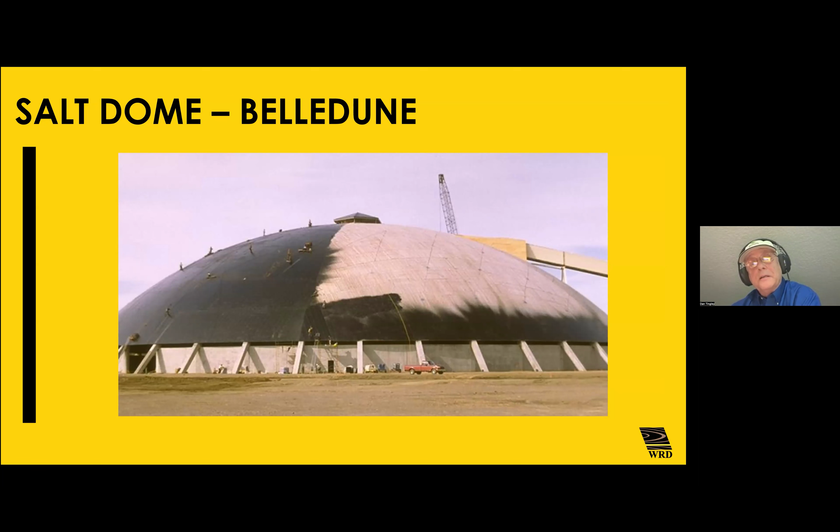This was our mass timber idea back in that day in the 80s, as you can see here, with the inside Belledune dome. What are we storing in there? Salt or potash or those sorts of things, in our large, very large glulam beam and glulam deck, or solid sawn deck buildings, which we called mass timber.

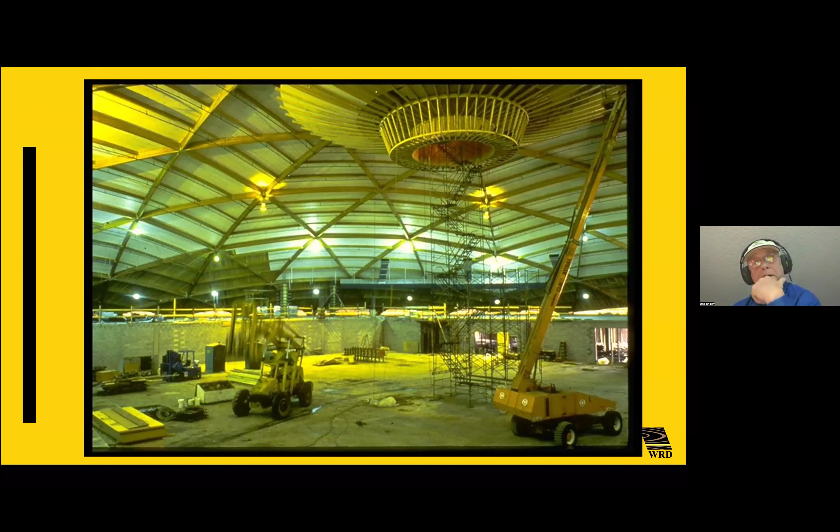Now, these great old buildings gave way to the 90s as we started to get a little bit more inventive with our strategies for curving and bending beams, as you can see here in these beautiful, aesthetically pleasing buildings that made bold statements about timber, and of course using timber in things like swimming pools, where steel just didn't do the job as well, because corrosive environments - timber just doesn't rust, as you can see here.

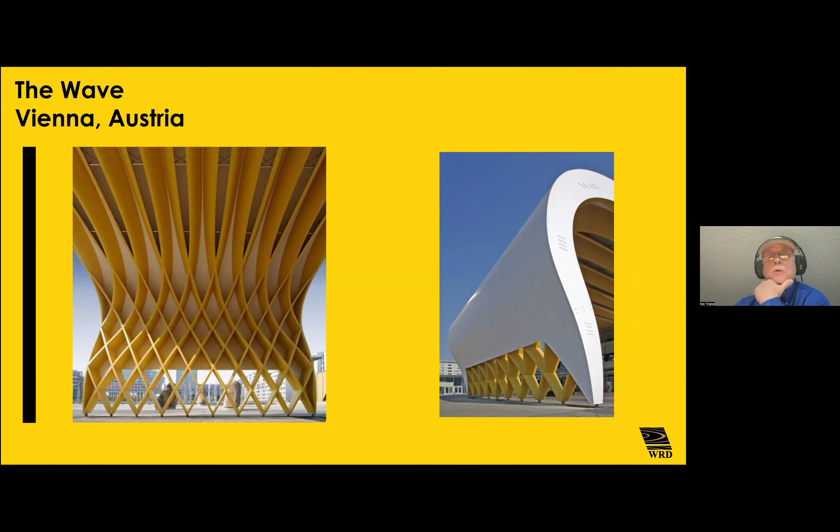Or this one I was involved with in Vienna, called the Wave. Only in Vienna did the oil money have enough money to make a wastewater treatment facility look like this. This is a high-strength fiber reinforced sinusoidal shaped glulam beam I designed in Vienna back in the day.

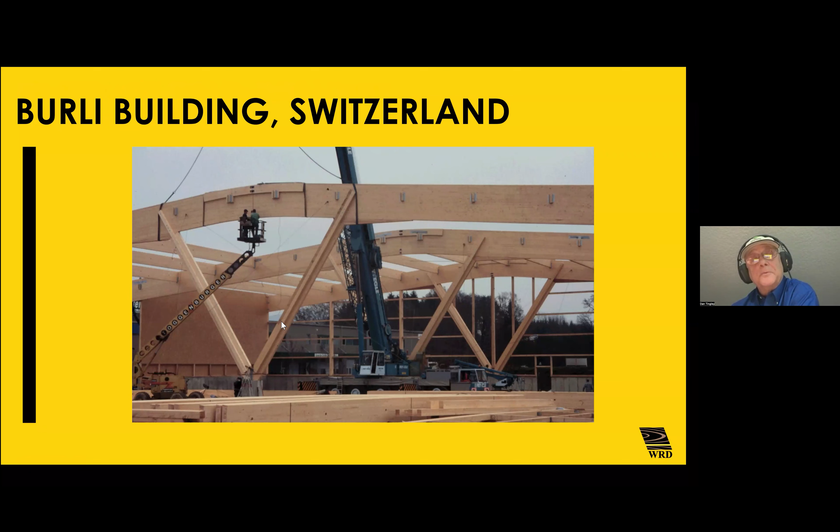Or another one here, a big playground equipment building. Again, what our vision of mass timber was in the 90s as we worked along with high strength fiber. You can see me bending over doing some QA on an FRP layer there. I had brown hair and more of it, as you can see. Now I've got a bad case of gray hair and less hair. I'm just getting older as the days go by.

But these bridges and buildings you can see here are just getting more and more extensive. This is the largest glulam beam in Europe, built with blowdown wood, from when we had high winds go through, and they were burning pyres of beef back in the day at McDonald's.

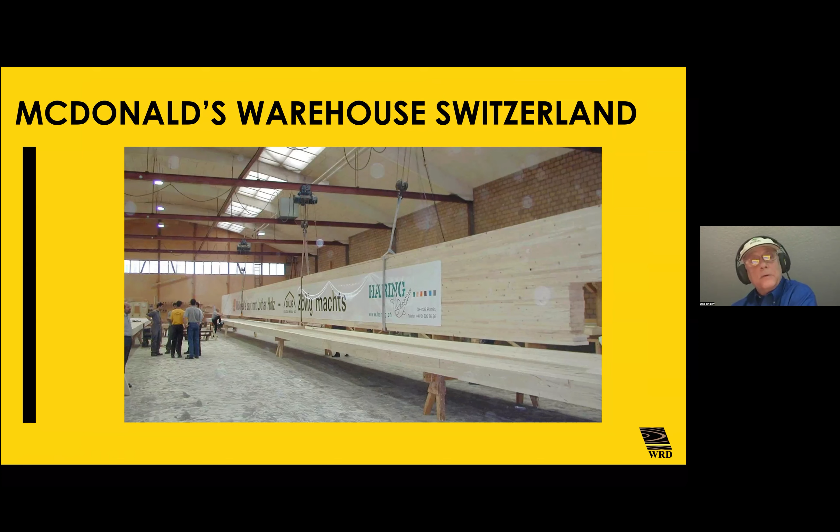McDonald's wanted to make an environmental statement. So in '99, we built these huge beams with high strength fiber out of blowdown wood. It was all micro-checked and shear. This is one half of a beam. We parked one half of a beam across the Autobahn, saying McDonald's building with blowdown wood, and parked 10 smart cars in front of it, and put the building up in 8 days because we wanted that increased speed of being able to assemble a roof system in place.

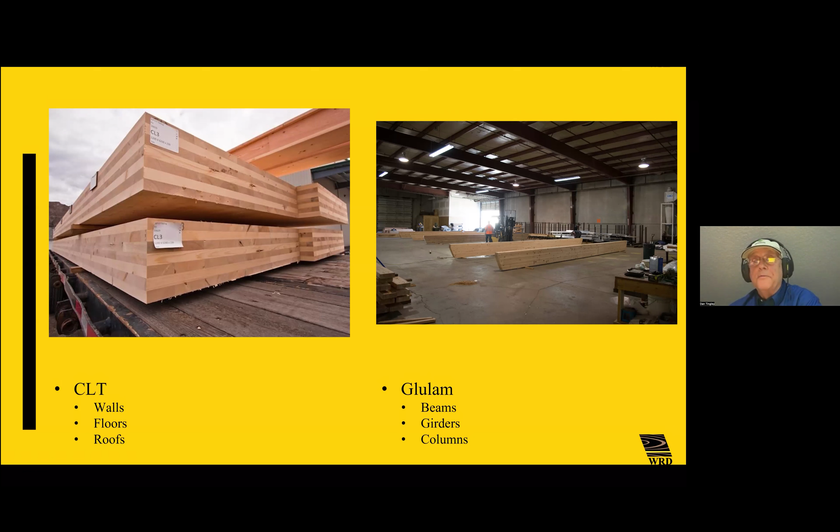And with this arrival, of course, is a whole level of interest that was not there in decades past. CLT, as you can see here, is basically cross-laminated timber, similar to plywood but made with much thicker solid sawn elements, to mate together with the glulam beams as you can see here. It's the traditional mode of being able to build a structure, lightweight compared to steel and concrete.

We can prefabricate components, and of course it has environmental advantages such as being renewable and having a low carbon footprint. The mass timber structures take on many forms now — we can have nail laminated timber, dowel laminated timber. We put them together with glulam beams and form up wall systems and post and beam systems, which allow us to build more effective structures that are aesthetically pleasing.

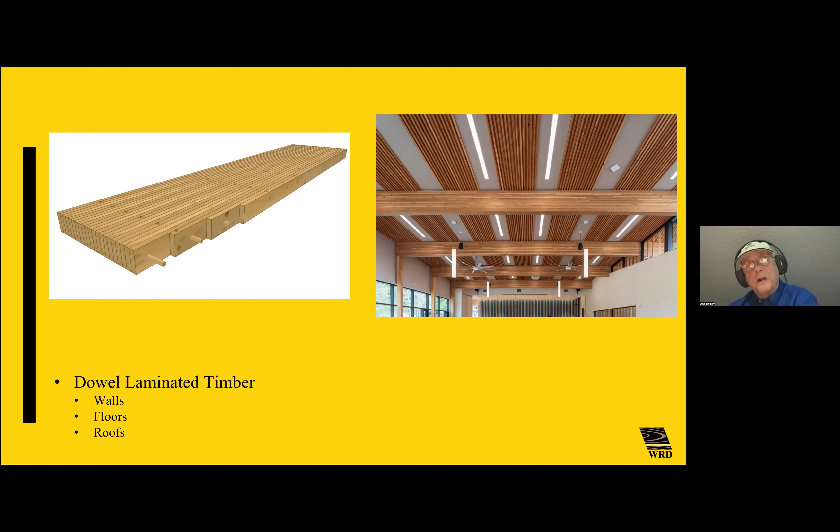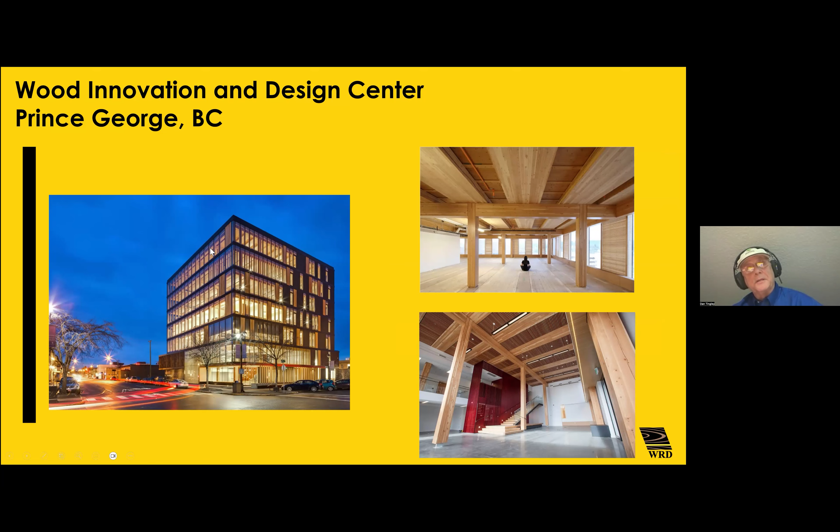Just how much lighter weight? In this particular bridge, the weight of the timber option was 1/5 — I'll say that again, 1/5 the dead weight of a cast-in-place option, and 1/15 of a concrete total superstructure and deck option. And of course, that's significant when it comes to reusing old superstructures.

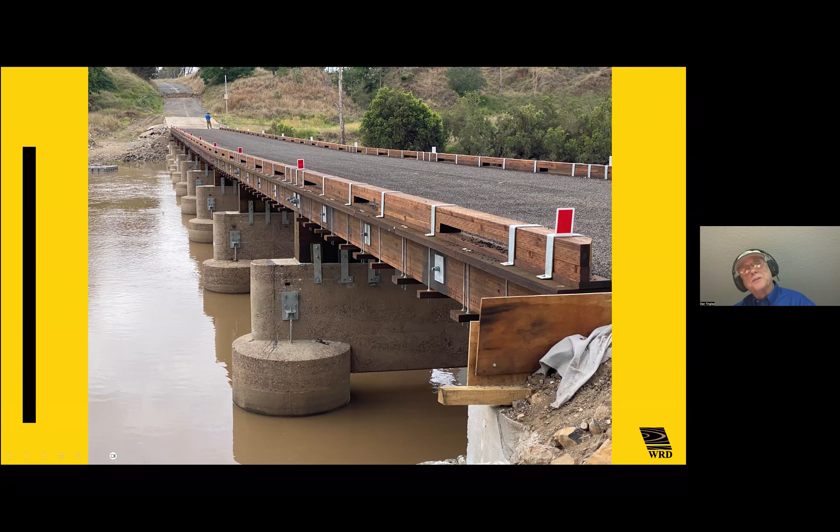As you can see here in this MPP deck system with a transverse diaphragm — what we call a curtain girder superstructure — there's a through rod that allows us to post-tension. Why are we doing that? Well, we've got to withstand floods, and the debris fields can be 4 or 5 feet high, hitting the side of this bridge 5 times a year. So we want a thin profile.

They don't install a TL4 truck crash-proof guardrail system — they want the river to top the bridge, they want the debris field to get by it. As you can see here, this provides for a typical new mass timber type bridge system, all pre-machined, pre-assembled.

This bridge was completely pre-assembled in the plant before disassembly and treatment with copper naphthenate in an oil-based solvent. Of course, you could not use a water-based solvent in this particular case, because typical water-based treatments like CCA or ACQ will swell the wood and distort the location of all the bolt holes, making it impossible to assemble on site later on.

So they're treated with an oil-based solvent and a reactive agent that fixes against the cell wall to provide that durability. Because one of the things the concrete lobby and steel lobby has used against timber is the claim that it isn't durable in their mind — that it's high maintenance.

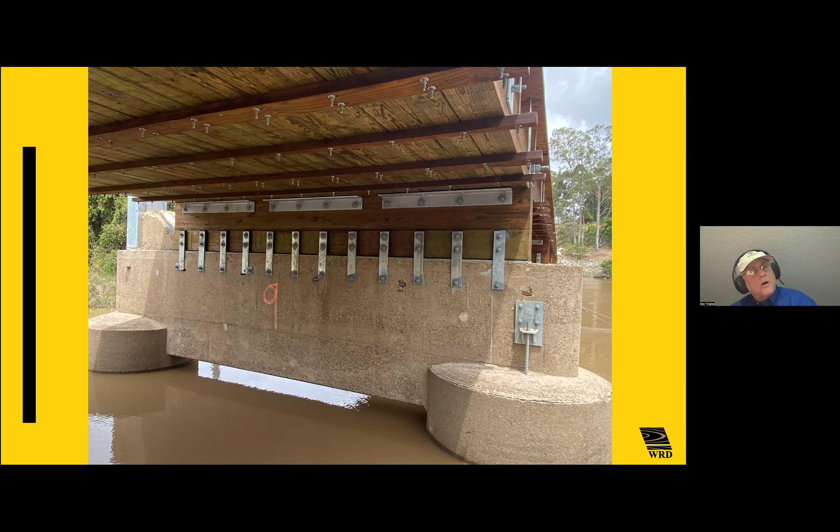And that's what they did. Well, guess what? Now concrete has got its own Achilles heel, as we're going to start to see here in a moment. And timber is making a big comeback, particularly in the mass timber form, as you can see here in this beautiful 10-span bridge. This bridge in concrete was $15.6 million. In timber and mass timber, it was 4.2. That's a significant difference, and one that drives the equation now.

Because of the naivety, the district chief engineer for highways in that area came to me when he looked at the prints, and he put a great big red line through our structural IFCs. He said, you can't build timber bridges anymore, they're not allowed in the code. I wrote back and said, I can't imagine what you're saying, because I'm on C9 and S6, the Canadian Highway Code, and I've been involved in AASHTO for many years, and there's timber bridges allowed in both codes. I'll see you at the bridge site.

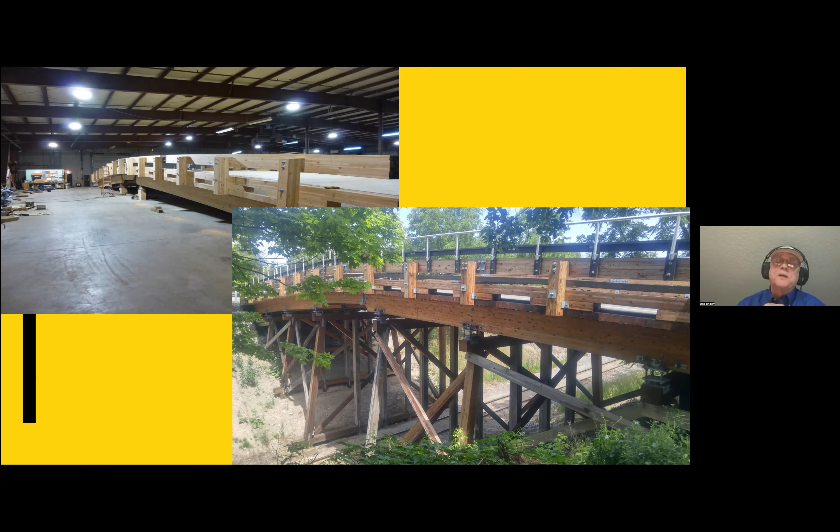Well, we arrived at the bridge site. He was there, he looked at this bridge, and there was no concrete. He said, well, you can't build a bridge without concrete, you have to have a concrete substructure at least. I said, why? Show me in the code where you're not allowed to put a bridge in place unless it's on a concrete sub. It's not there. It isn't there because it's not the truth.

The fact of the matter is that timber can perform well in not only superstructures but substructures. One only needs to look at all the timber piles driven for bridges around the country. Obviously, it doesn't have to be on concrete.

This bridge here was relatively new in the last 10 years. It was completely pre-machined, pre-assembled, taken apart, post-treated, lettered, numbered, shipped to the site. And of course, we compacted and put down an abutment bent instead of a concrete bent, instead of cast in place. This bridge went into service in about a third the time. Why? Because we didn't have to wait for concrete to cure. We didn't have to carry 8 times the dead weight, and we could put it into place such that this bridge from start to finish was 21 days on the install.

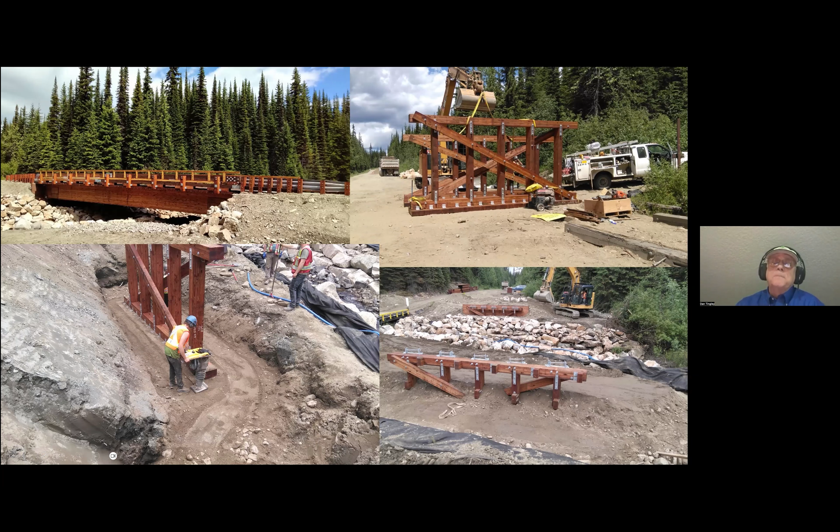The concept of doing that in concrete on a heavy 100-ton bridge, which this is for forestry haul, it just wouldn't happen. So this is the other place we see timber really shining.

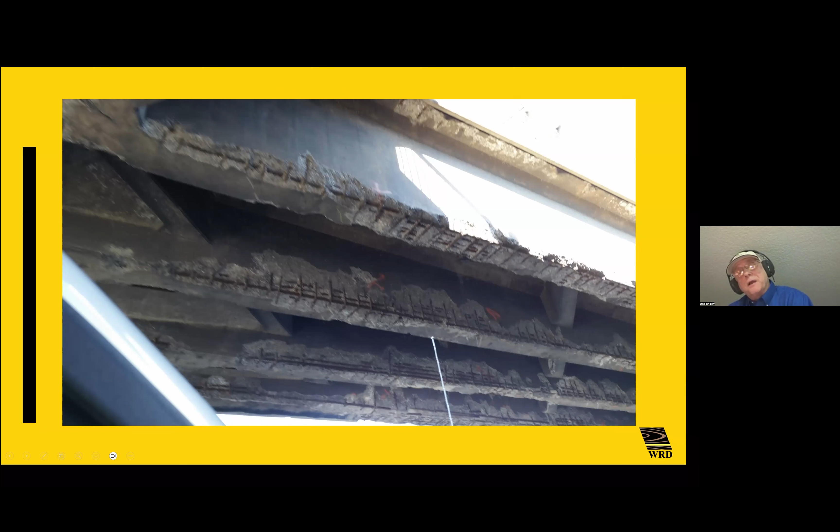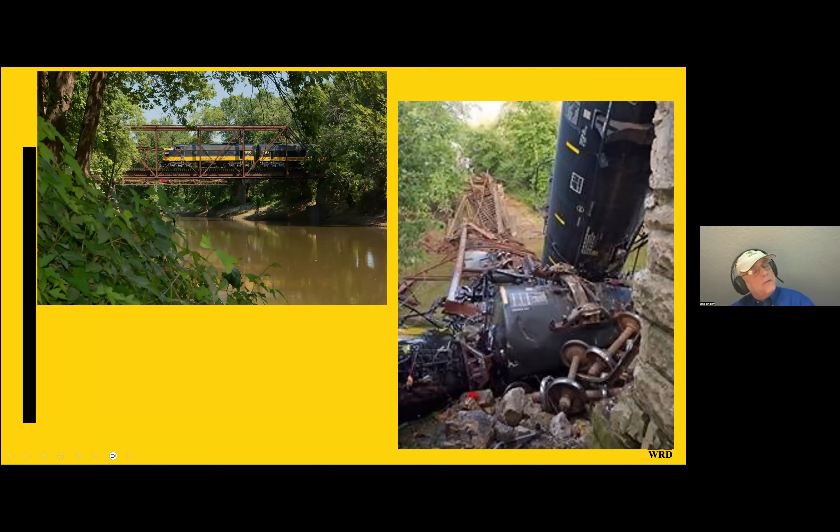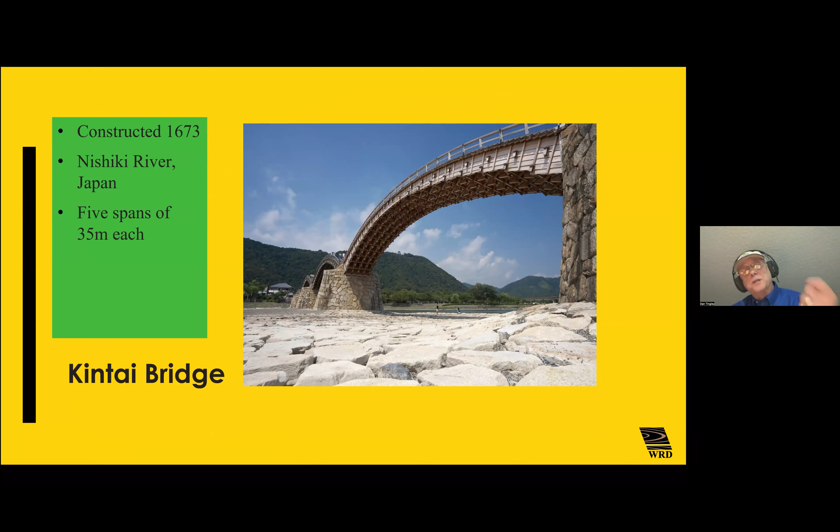It's because they're growing their connectors, and these connectors mean that we don't get moisture to the inside bright zones of these timber pieces, allowing decay to take place. So the same thing can happen when we build them.

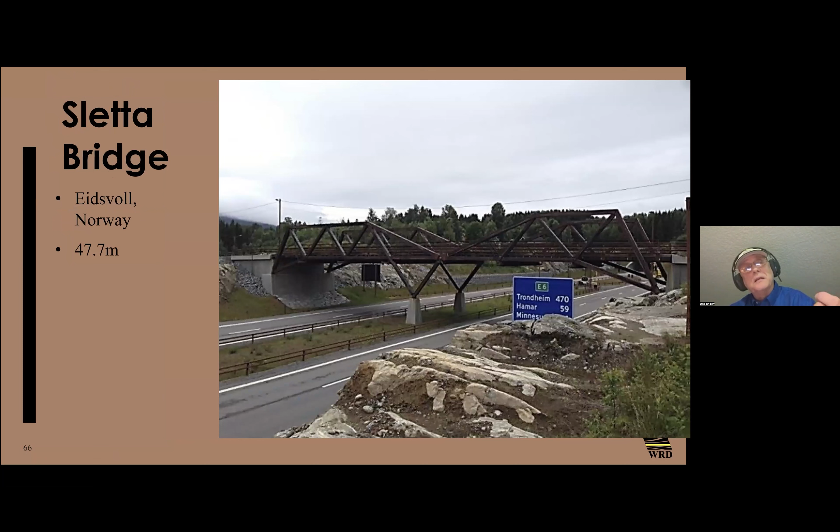Now, these are new bridges built in the last 10 years all over the world. Look at these spans - 47 meters, that's a long span, close to 150 feet. You see another one here. All over Europe, we're using these spans, creating long span bridges, replacing concrete and steel because wood doesn't rust.

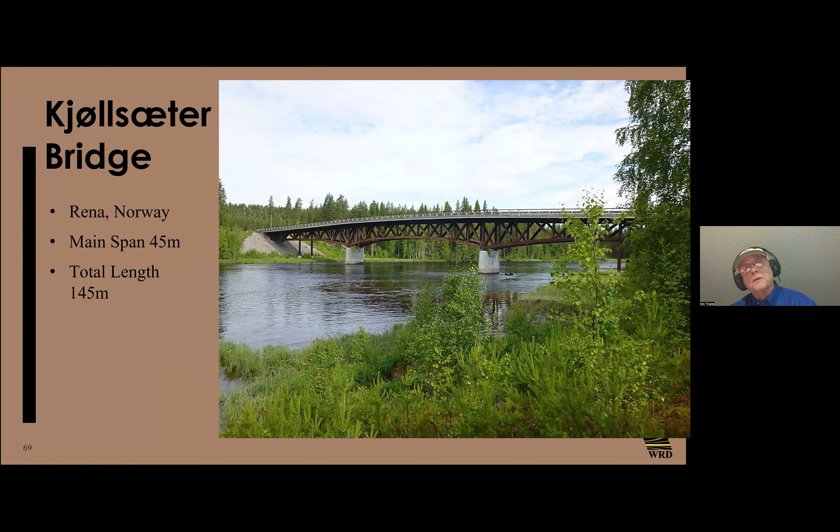And if you find ways to keep the moisture out of the bright zones in the interior portions of your timber elements, they're going to last a long time, as you can see in these various photos. Beautiful timber bridges, building roofs over the top of them to keep water off of them, to keep them going the distance.

This one in New Jersey, similar - putting them together in bits and pieces and keeping them going down the road. This one here was 10 tons. It was an old timber bridge that had an MPP deck on it, not treated. Of course, the vertical fasteners went in through the top and let the moisture in. It was 80 years old. It was time to go.

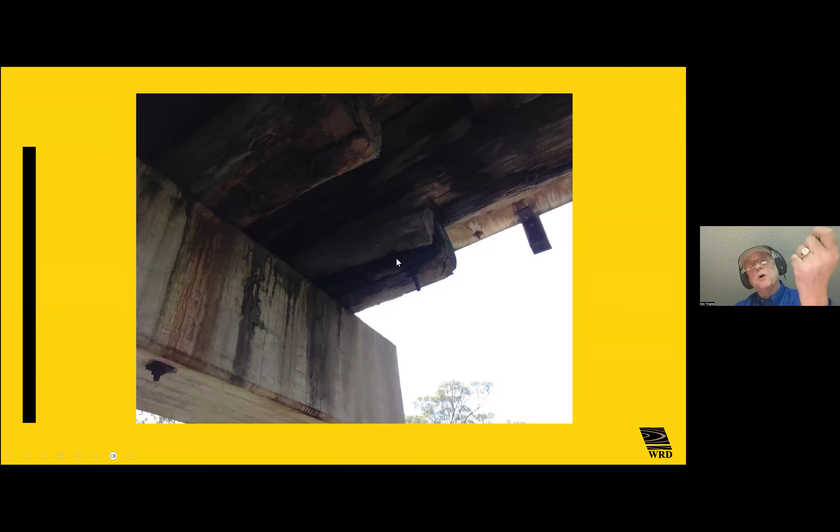We had a community, an island community, that would have been landlocked. A bypass bridge was $2 million. A concrete bridge was $6 million. So in 11 days, they built a floating scaffolding and replaced this bridge piece by piece, putting it back into service in 11 days to get where they're going.

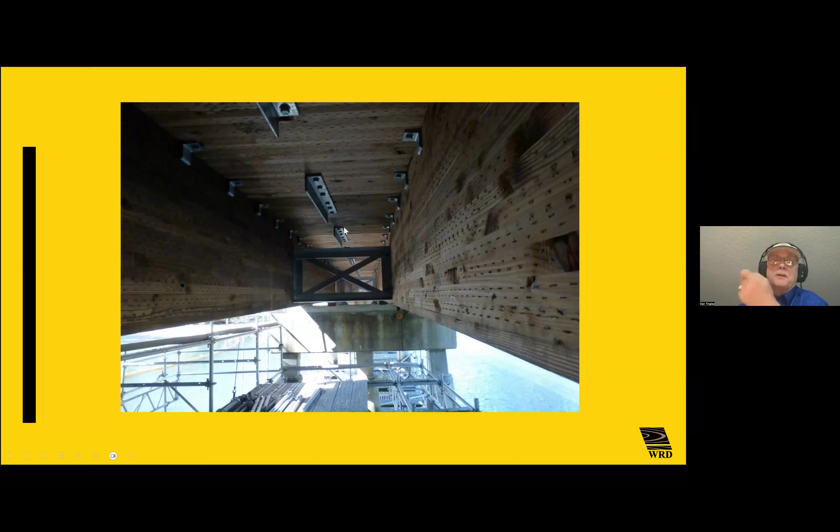What was different? No vertical fasteners from the top, and no treated wood. That's a eucalyptus hardwood chosen for its durability, with stainless steel clips from the bottom, everything originating from the bottom but not passing through the top surface, as you can see here, with expansion slots to allow the deck to shrink and expand as it picked up moisture. You can also see gauge beams that provide for differential deflection to keep the asphalt from reflective cracking.

So you can see here, this particular case is in the jungle, way up close to Papua New Guinea, where they are putting in a new timber bridge in a very harsh environment: the highest decay hazard zone, the highest termite hazard zone, the highest embedded and exposed corrosion zone. All of these factors would normally lead one to consider putting in a concrete bridge because they'd say, well, it's got to be durable.

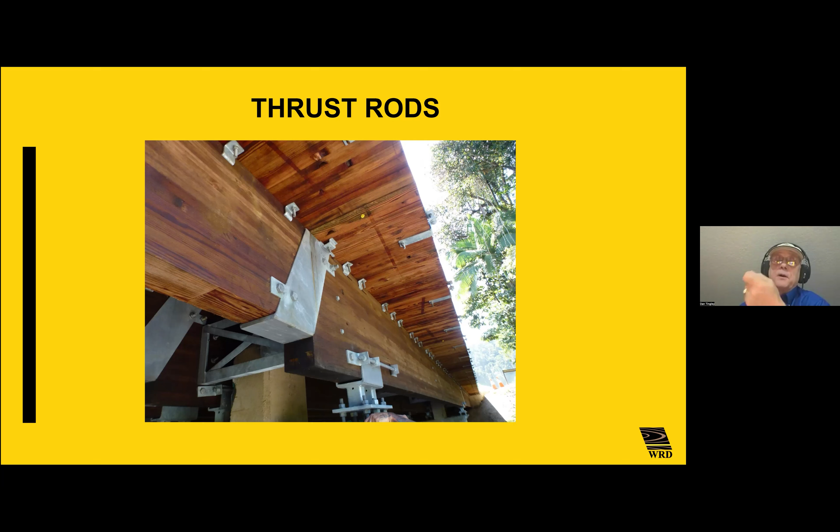Well, timber can be durable too, creating a great solution for this bridge replacement, with thrust rods, for example, to allow us different spans. This bridge was built in Jefferson, Oregon, and shipped halfway around the world into the jungle to be installed. Why would we do that with timber unless they were confident? They're confident because they like the carbon aspects and the durability aspects we can create today with new technologies and new concepts.

Same goes with this. This is on the west coast of Australia, an old timber bridge that was 100 years old, and the community wanted to keep that timber bridge in service. They didn't want to take out the history of the past. So we developed a restoration system that took out these old vertical fasteners in the deck and put a new deck down. And we didn't heavy-coat paint the large dimension timber.

You can't put heavy percent solids, over 29% solids coatings, on large dimension timber outdoors and expect it to last. It has to be less than 29% solids if you're going to see it last. That looks like paint, but it isn't, as you can see here in this whole new system. And you're turning the rails 45 degrees so that everything runs off, keeping the proper scuppers and no verticals in that whole system. Our design kept that bridge open for traffic while they upgraded it.

So the advantages of timber bridges are pretty important to note. Typically, on average, it's 1/8 the dead weight for an equivalent structural capacity concrete bridge. This allows a smaller substructure and subsequent cost savings on the foundation and site works. On long spans, the self-weight of concrete becomes the biggest design factor.

One of the greatest things I like to do as a designer is get involved in a long span design—79, 80, 100 meters, let's say 350 feet clear span—and use high strength fiber, because I know in that particular case, the self dead weight of concrete is going to be their biggest single design factor, and that's where they are just not in their sweet spot.

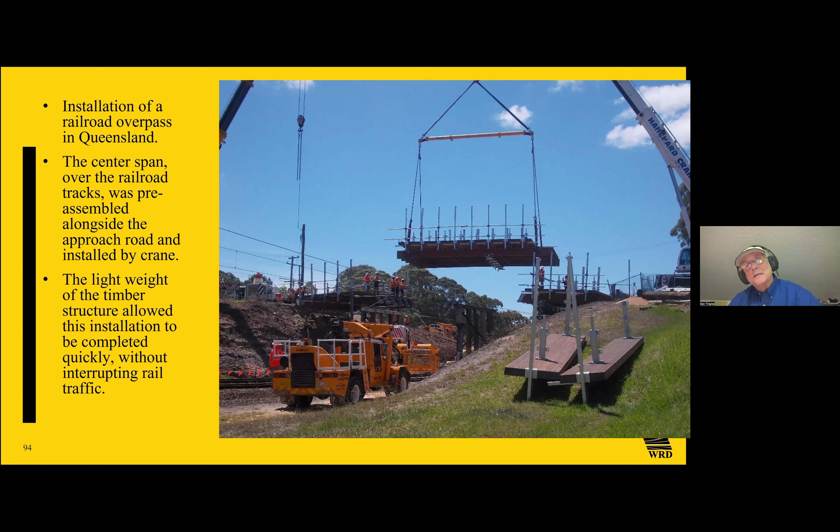This rapid installation is a big feature of wood, and low initial cost. Traditionally, the minute we exceed 100-foot clear span, the cost of the super and deck starts to migrate down to be 60% less than concrete and 30-some percent less than steel. Reduced carbon emissions is a big, big feature—21 times for steel, 16 times more effective than reinforced concrete, as you can see here in this particular bridge.

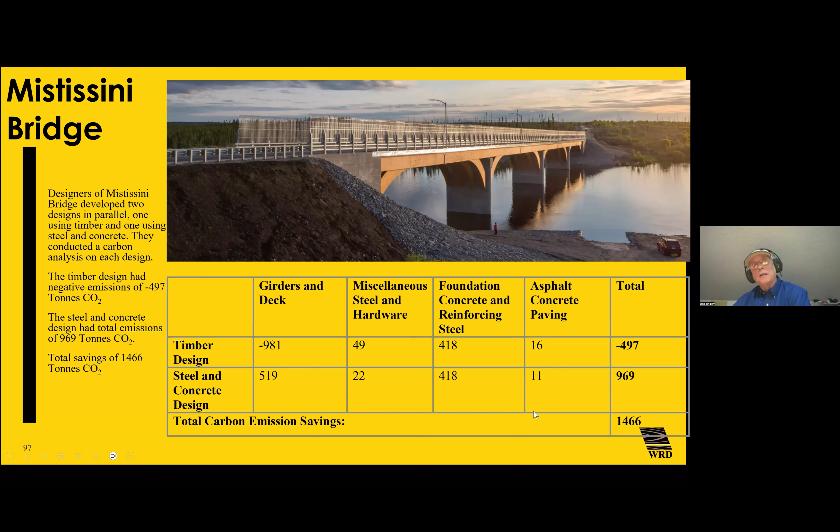Look at the savings here - that's a metric ton savings. That's a lot. So these chemical resistance features are really good too.

We often talk about salt on the road up north, or salt-sand mix up north on the roads. And this salt really works a magic on reinforced concrete - that chloride-rich environment takes it out easily with spalling and other issues related to reactive aggregate.

And of course, resistance to freeze damage. We all know that wood has a much better freeze-thaw cycle resistance than concrete.

Fatigue resistance - we don't need to use a fatigue factor in timber. In some countries, like Australia, where the timber code portion of the bridge committee has been controlled by the steel guys, they artificially put a factor of 2 in for fatigue for timber, which doesn't even apply.

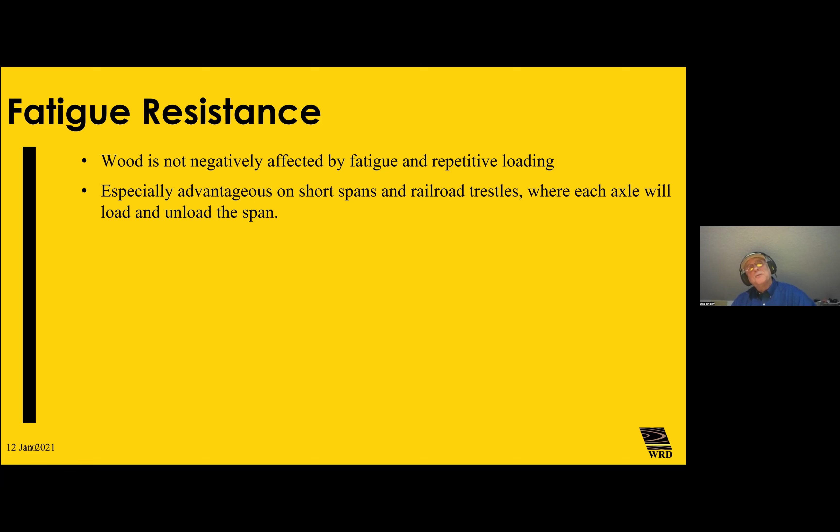We still have some codes in Europe specifying expansion joints in timber bridges. Wood doesn't expand thermally enough to require a joint - there's no expansion joint required. The only joint needed is for differential deflection between an abutment and the timber deck itself.

So where do I work? I work at Wood Research and Development. We're a code-approved test agency, third party and testing. We're also an American Lumber Standards Committee test agency. We have a commercial engineering wing. We do a lot of testing and design.

We developed advanced fiber solutions. This is one of our big areas that really feeds into mass timber today, using high strength fiber like Kevlar particularly, which matches well with wood because of its thermal coefficient of expansion properties. And using these high strength fibers in a way to basically transition by localized defects in the wood, like slope of grain created by knots, for example.

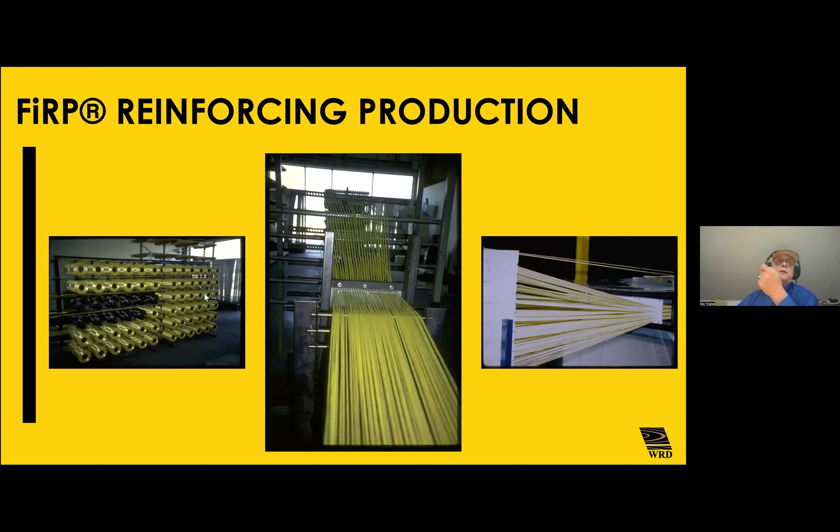So now you can have high-strength fiber on a roll - you can have up to 2 miles if you wanted on one roll. You use it and cut it off in certain lengths, put it in strategic locations. It's 5 times the strength of steel at a fifth the dead weight, and matches things well.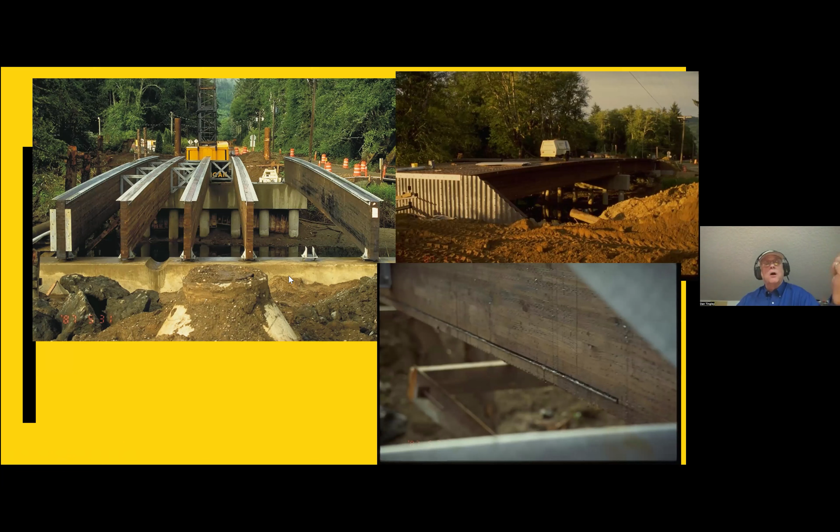And it's been in service a long time, and it's in the AASHTO standard, and it's in various codes around the world. It all originated from my design principles back in the 80s and 90s. As you can see, this first highway bridge in America was built in 1995 in Clallam Bay in Washington State, in service since that time, doing a great job.

You can see the high strength fiber here, doubling or tripling the moment capacity. And through fire test, we put it through for both single member and assembly methods.

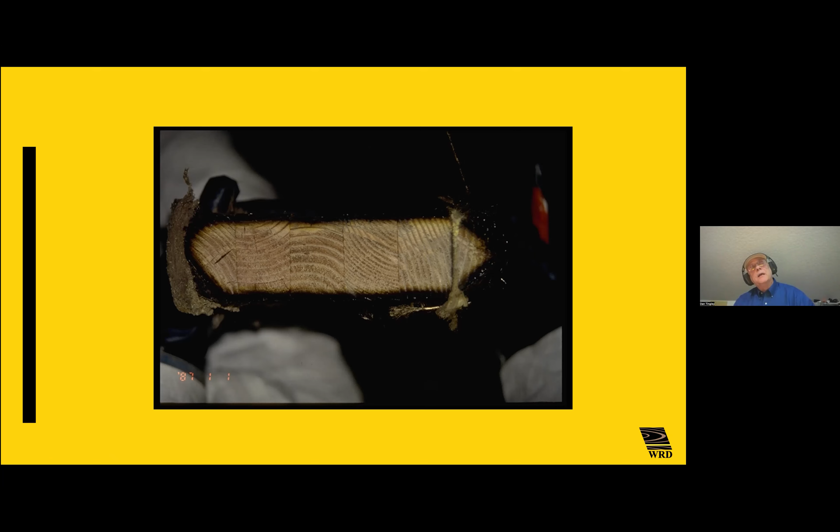And one of the great things for high strength fiber is, what does it do? It increases the moment capacity by 2 and 3-fold, allowing us to get 2 and 3 hour fire ratings out of our timbers because of increased moment capacity. We often say wood's governed mostly by stiffness. Well, that might be true, but moment's close behind, and what drives egress and access in fire scenarios is moment, and being able to increase its capacity with high strength fiber that way, giving yourself more time, is very important.

Of course, testing in our lab has formed a huge part of it, with over 3,000 full-scale beam tests over the day, including strain gauge data all the way across to establish where shear is at a maximum, for example, and so on. So you can see the size of our beam tester in our lab.

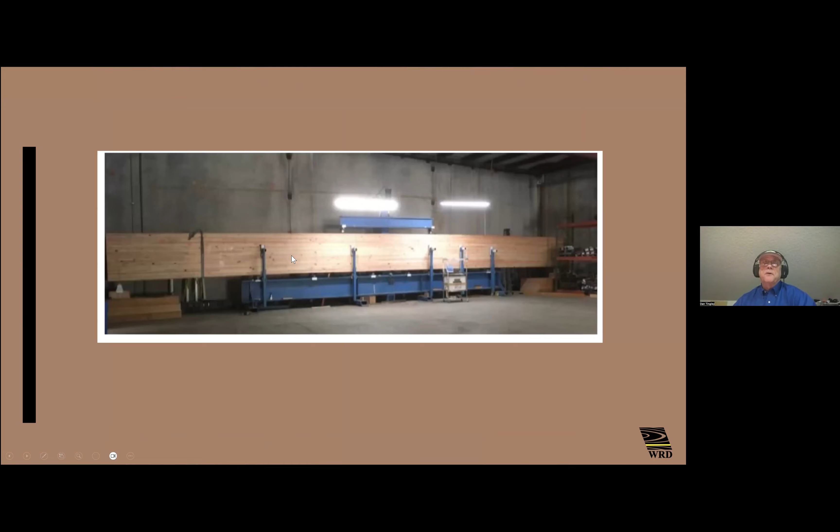We do some big beam tests and small ones, and pile testing, as you can see here with strain gauging pile wraps. We developed the Fiber Wrap 2 product that Osmose use on the utility poles.

So this full-scale established testing is there also to look at things like horizontal shear. 65% of horizontal shear failures occur at the late wood, early wood interface in wood. So how do we gauge that and deal with it?

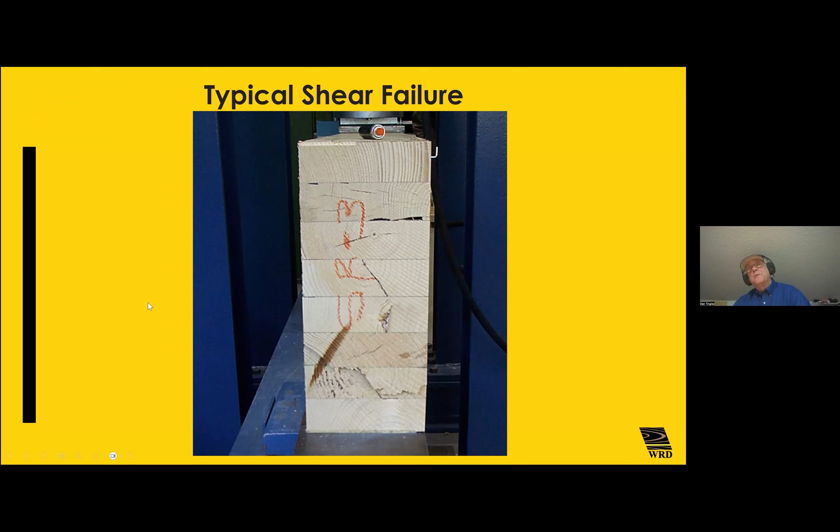Well, you can have high strength shear reinforcements as well, increasing the shear capacity of a piece so that we strategically design these mass timber bridges now to be fine-tuned, with strategic location of advanced materials to handle shear, and strategic location of advanced materials to handle high tension zones. This allows us to post-treat and get where we're going.

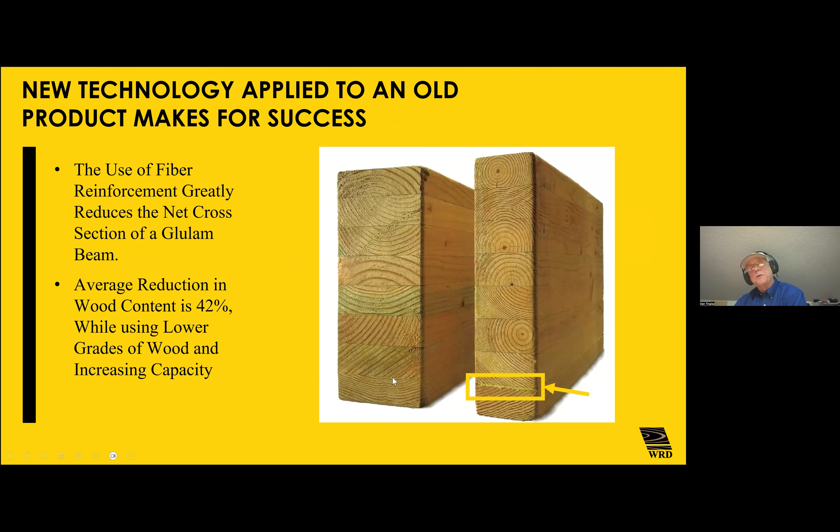You can see here the fiber on the right, reducing 42% of the wood fiber needed. And the wood fiber used is all low grade, as you can see here. The one on the left is equal to the strength of the one on the right.

We just basically reduce the variability, which increases the capacity too, by reducing the amount of premature failures due to slope of grain, due to knots. You get a knot in the bottom face of wood, and it creates a slope of grain.

Wood's tension perpendicular to grain strength is its weakest Achilles heel. When you resolve the stresses around this knot in the slope of grain, that's what causes the failure. That's why we don't like big knots in the bottom face, whether in solid sawn elements or in our glulam beams.

So there's a dichotomy of high strength fibers available out there today. Everything from quadraxial tribrid wraps for piles to high strength fiber in tension, and for shear panels and off-axis shear. So we do a lot of this testing, as you can see here in the lab.

We develop wraps, as you can see here, for utility poles and piles. We do compression tests for these to establish what capacities are with both the wraps and the injected slow cure epoxies that are used to fill voids, for example, in the restoration of old structures.

And this then allows the implementation of these high strength fibers to mass timber bridges, to fine tune this to make us more and more competitive with steel and concrete.

Today, just so we understand, this isn't about initial cost. If it was about initial cost, every bridge being built in America today would be timber. This is about a victory that was won in the 60s, 70s, and 80s to convince an industry that timber didn't last and had high maintenance costs.

We're about convincing an industry today that that isn't true, that you can build these bridges out of timber and use things like shear panels to get where you're going.

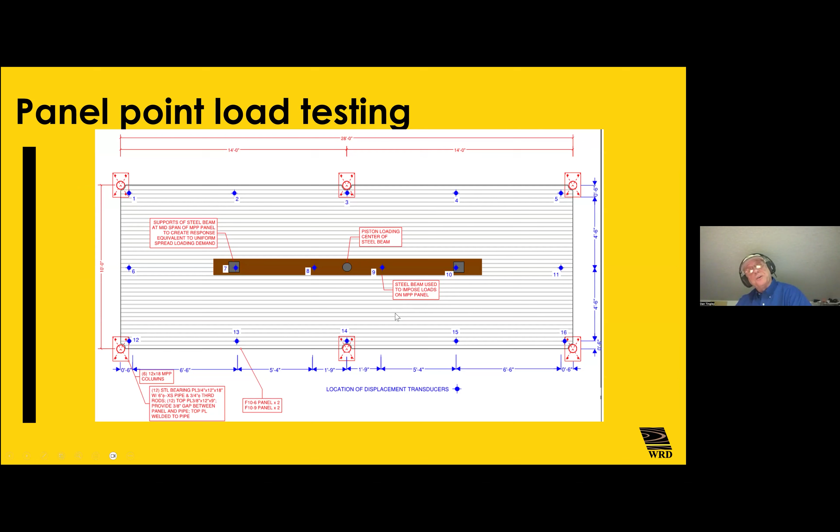Not only in shear panels from the point of view of minor axis shear issues, which you can see here in one of our test setups at the lab, where we developed a way to increase the minor axis shear for platform framing of mass timber versus post and beam framing.

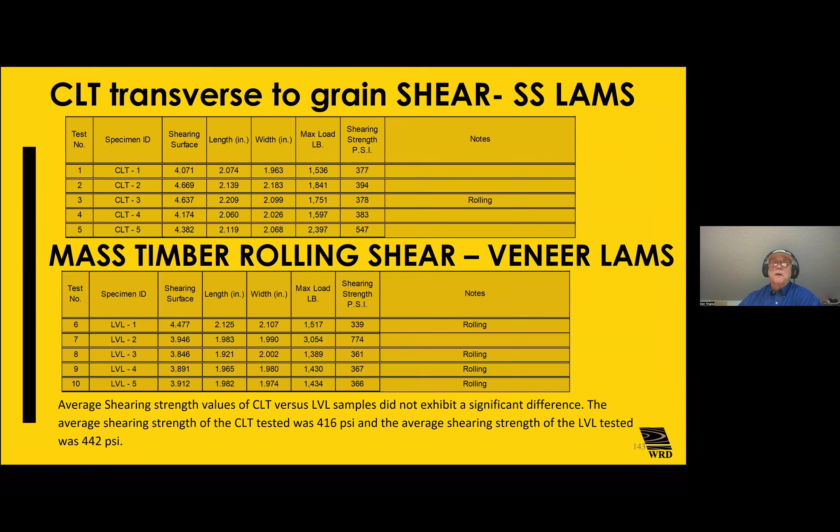As you can see here, the placement in these CLT systems of high strength fiber on the tops of the columns deals with transverse or rolling shear issues which exist in CLT, as well as mass plywood panels. That rolling shear issue is a result of the weakness of wood in cross grain to shearing, as you can see here.

So this shows you a reinforced panel that gets placed at strategic locations in CLT and mass plywood panel to get where you're going, taking this system to this system, and getting where you're going with thinner panels in this system.

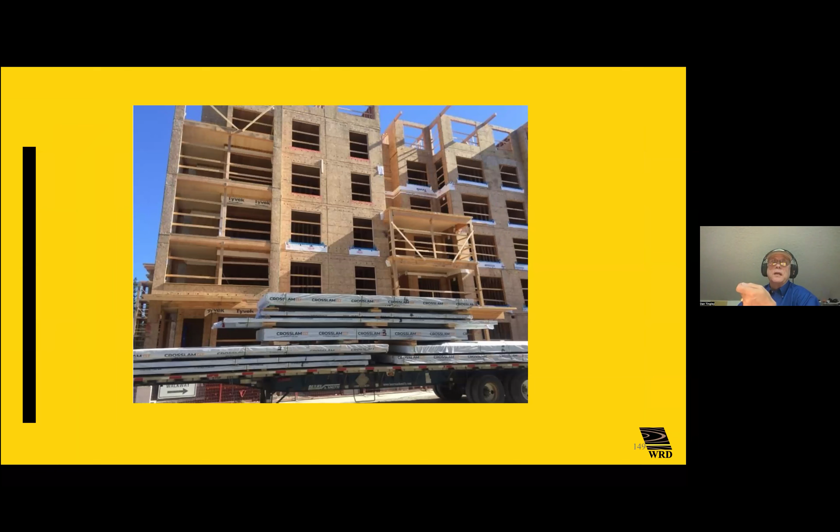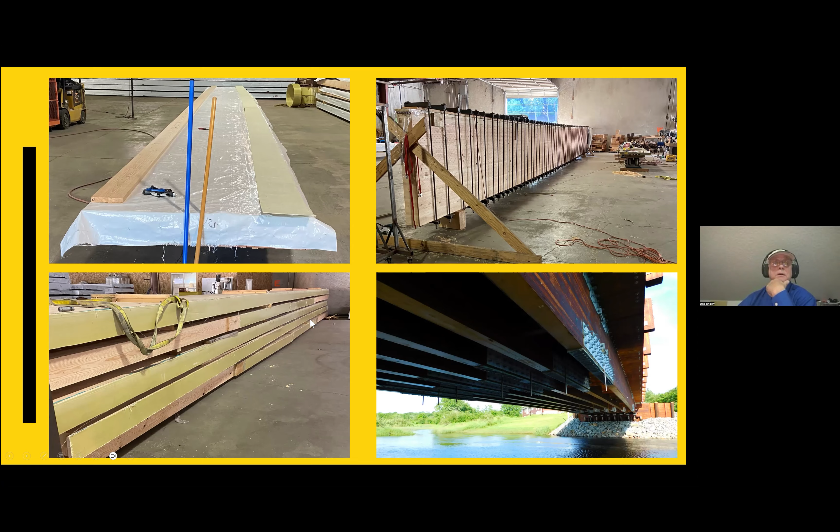In rolls, to be unrolled and used in strategic locations. This has advanced the use of timber in bridges more than perhaps any other development in the last 20 years, to get where we're going with a lot better capacity. You'll see here the placement of this FRP in its particular zones. You see it here.

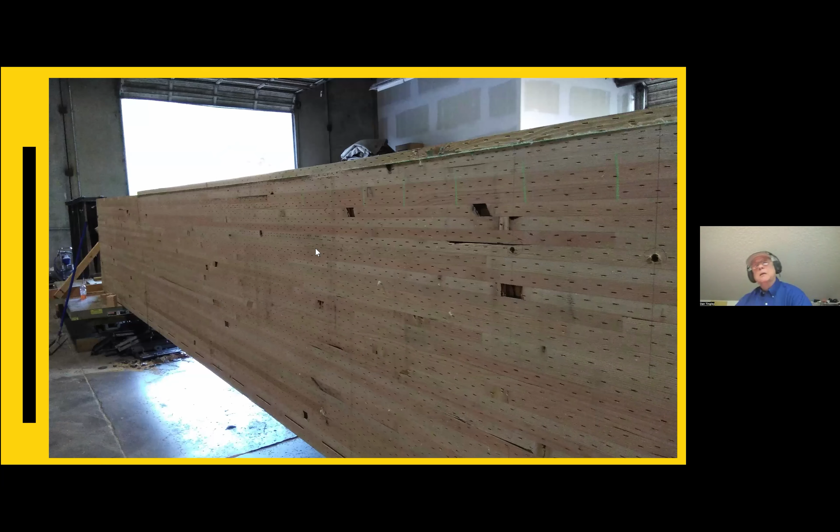So we'll use this to do wood welding. As I said earlier, wood welding is a big feature today with bridges because you can't ship things in America over 60 feet. So how are we going to make a 380-foot long bridge? Well, we're going to wood weld that together on site.

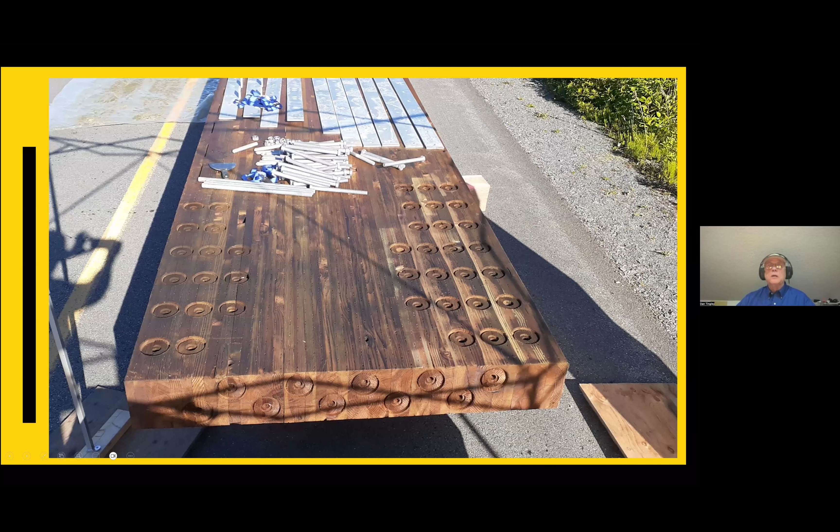We pre-machine it in the factory. As you can see here, all the shear plates are pre-machined. We take these pieces of timber and put them together with strategies involving shear plates, shear pins, doweling, side plates, and bottom splice plates. They infill all the cavities around the split rings and shear plates, depending on what's used.

They're all infilled with structural epoxy so there's no slip distortion at a joint in long span beams. We use thrust rods to pull it together to get the 125 PSI we need on a butt-to-butt joint, and then we basically create a wood weld at that location with high strength fiber, equal to 125% of the wood's capacity in any other location, as you can see here.

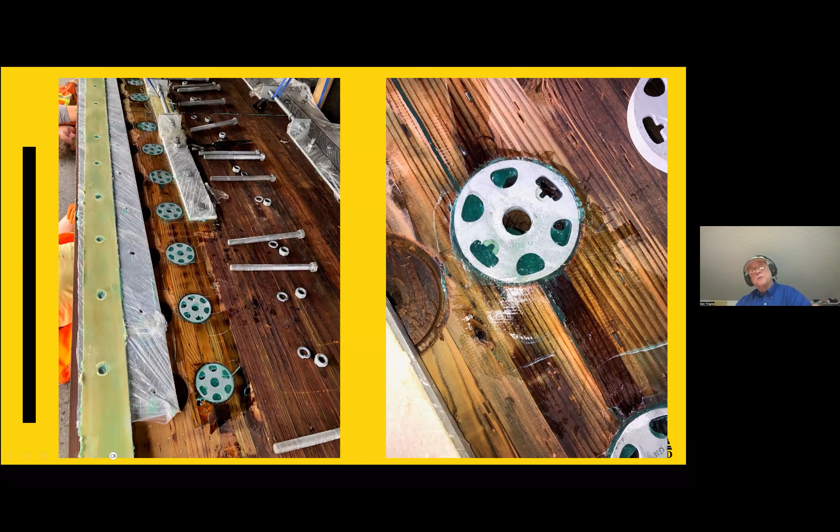This is new technology, new concepts creating mass timber bridge opportunities we haven't had before in the industry. You see this piece of Kevlar here with a design capacity of 215,000 PSI. Strategically placing this in certain locations gives a huge advantage.

And why is the steel completely saran wrapped? Well, you can't marry up steel with wood and glue it, because steel's thermal coefficient of expansion is so significantly greater than wood that modest changes in temperature will create a blowout in that steel plate. It will lead to expansion that exceeds the pilot hole size in those plates and create distortion in the connector, creating lateral loads on lag screws, for example, in the splice plates, as you can see here in the bottom face.

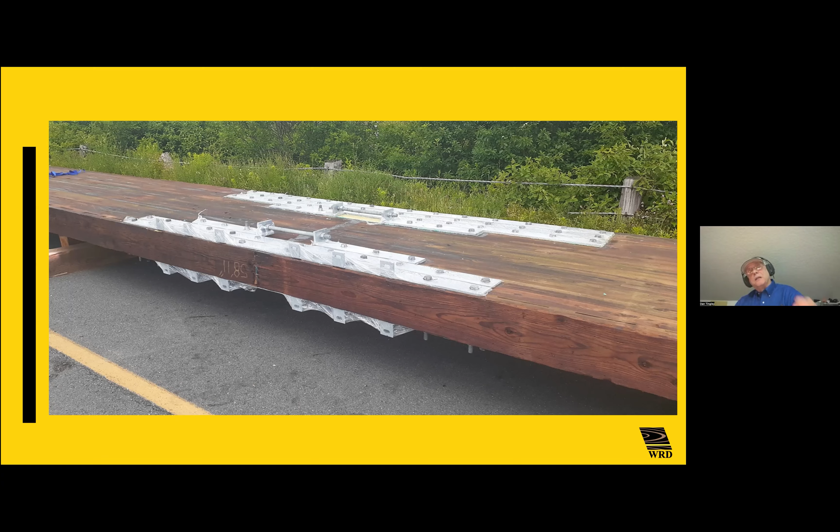This wood welding is a serious opportunity forward in the competition with concrete. When I can go 4 beams at 60 feet apiece, 240 feet long, and create that beam out of timber, it weighs 1/12 the dead weight of concrete, costs 60% less than the precast concrete girder, while carrying the same loads as the concrete.

This is what vaults timber ahead of concrete in these locations. This particular bridge, called Dillman's Bridge, was $6.2 million in precast concrete with cast-in-place abutments and deck. This bridge here, built out of timber, was $3.2 million. Those are significant savings that create the opportunity.

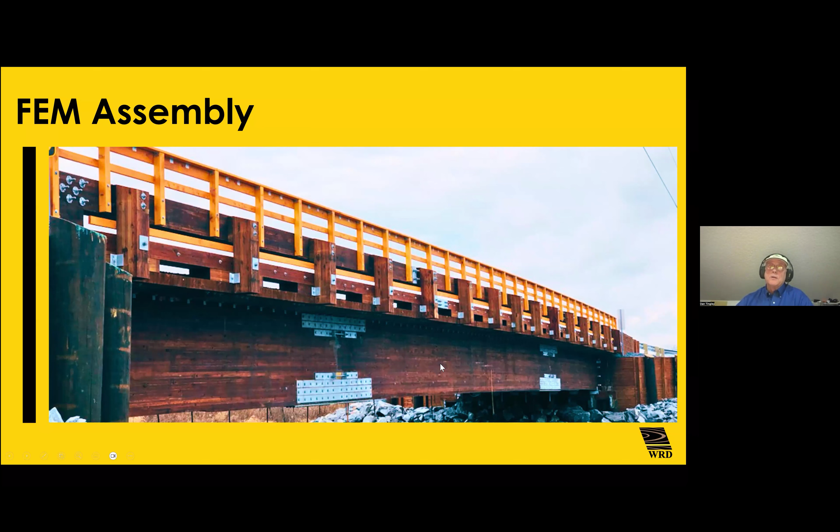In timber, when you get large dimension pieces, it chars, or if you want to protect it, you use an intumescent. Today we use intumescents on our timber when they're in fire-prone areas to get the extension of life we want and protection against bushfires and so on, as you can see under this bridge here.

Not to brag about this, but in 1996 we won the Charles Pankow Award for Innovation for this. Then in '97 we won the Nova Awards, the first time ever won by wood. We were up against the steel-less deck system in the first award, and for all construction products we were up against mostly concrete and steel competitors. Timber won those awards.

At our lab, we do things like species identification. We take cores from old bridges, as you can see here, and identify the species, the grade, and the moisture contents to establish things like the average moisture content in a closed deck timber bridge, which is 14.2%, not close to 22 to 24, the decay point. In an open deck bridge it's 16.4%.

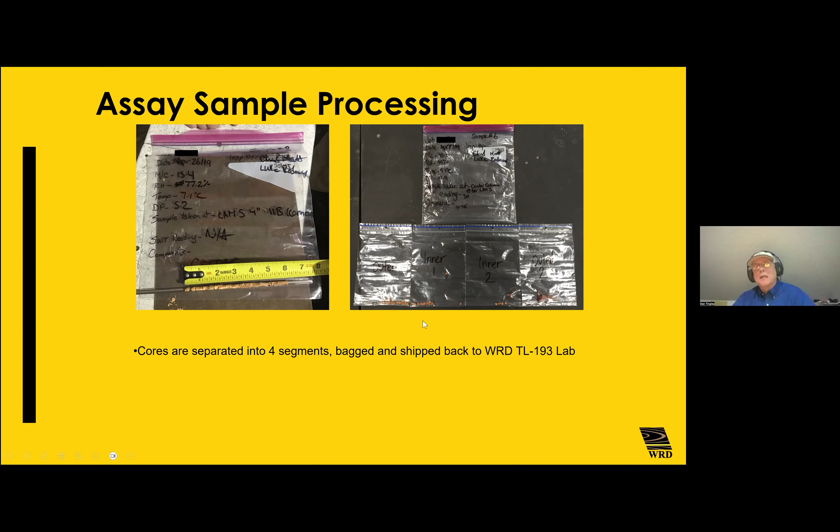Again, not close. So why is the moisture content in the average bridge today in America that low? Why is decay the number one killer? 80-some percent of all timber bridge degradation is due to decay. Why is it? It's because of our vertical fasteners, and because of the way we design and do things.

So we get in with our lab and start doing these assay samples. We identify species, we identify grade, and we tell a client what's going on in their bridges as we work through with these species and grade identifications.

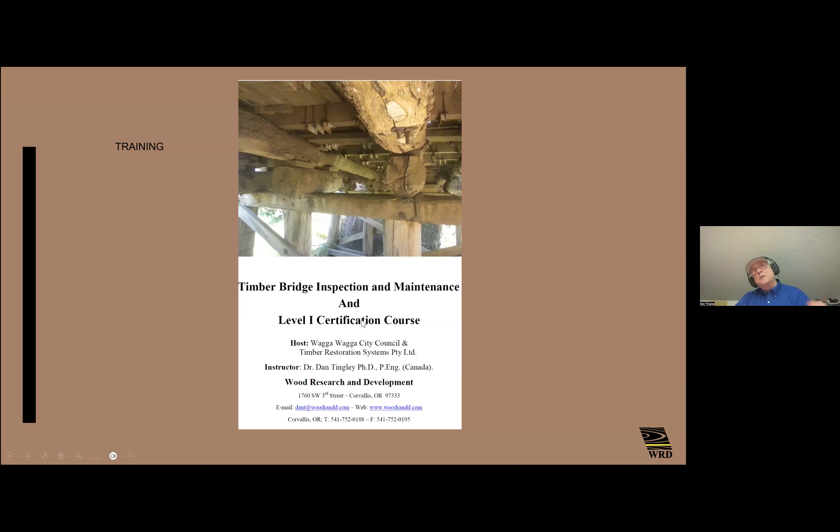These courses are part of lifting the game in the business today. I head out in a couple of weeks to teach a Level 1 and 2 course up in Northern Australia about timber bridges, for example.

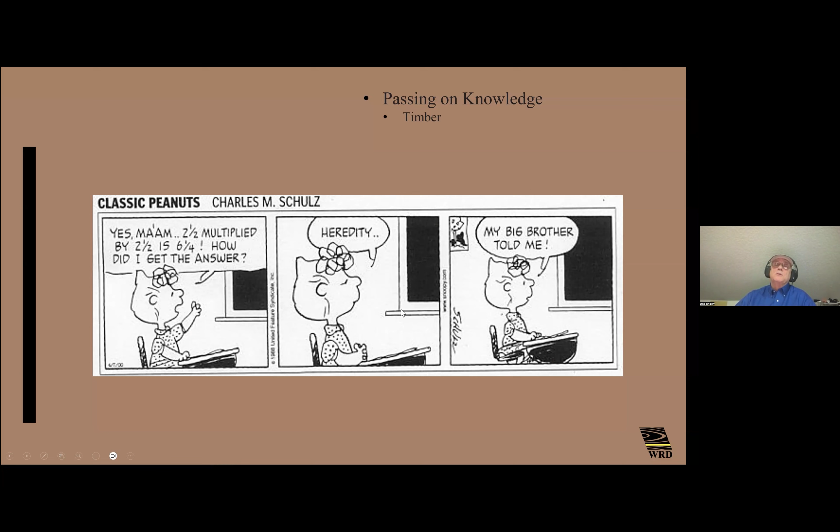It's about passing on knowledge, what we know. It's what we call heredity - that's what my big brother told me. That's what we like to do in the industry, is help people understand, because a rising tide brings all boats up. If we can help people understand how timber works, then we won't build bridges that have high maintenance costs and don't last. We'll take that hook out of concrete and steel's hands and put it back in timber's hands.

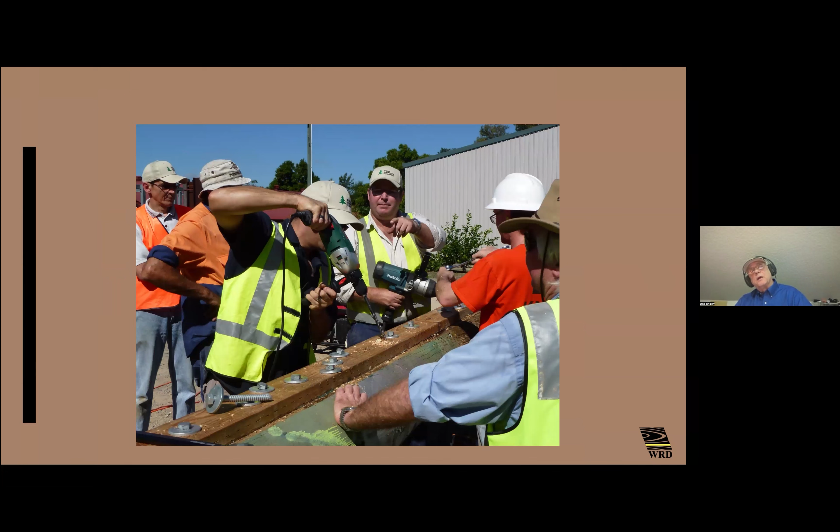So we're heavily invested in training people around the world. I guess probably in my career some 4,000 students have gone through my courses now, where we teach them everything from high strength fiber wrapping of piles, to how to diffuse wood using naturally occurring salt rods, and how to make sure that if you ever wrap a timber pile you've got to allow for expansion, because capillary action brings water up in that pile and expands it, putting a lot of hoop stress on the wrap. You must use a diffuser of some kind to protect that wood, because that moisture will come up over 22%, 24%, and lead to decay in the interior bright zone.

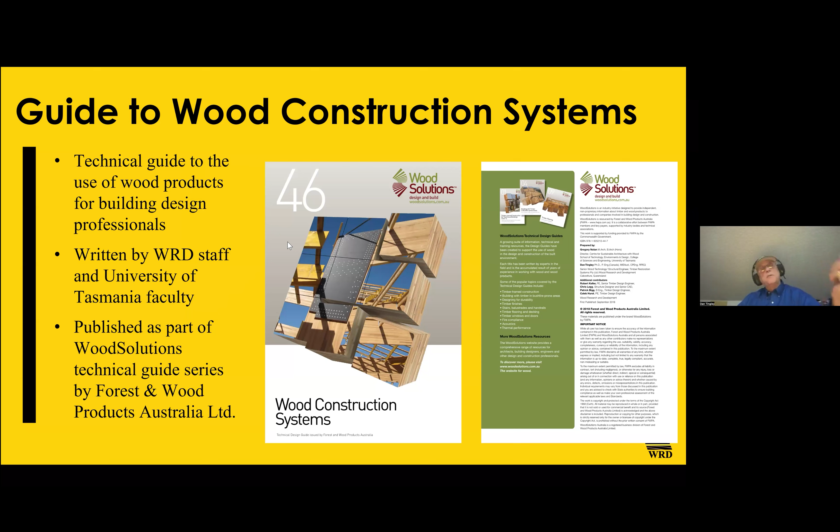We also write books. This is one that Greg and I wrote, Guide to Wood Construction Systems, where we talk about everything from multi-floors to Tudor arches to dome buildings on the top of timber buildings. Who would have thought, when I graduated back in the 70s, that I would be writing a book about having a swimming pool on the 18th floor of a 20-story mass timber building? We are way beyond what we thought about back in the day.

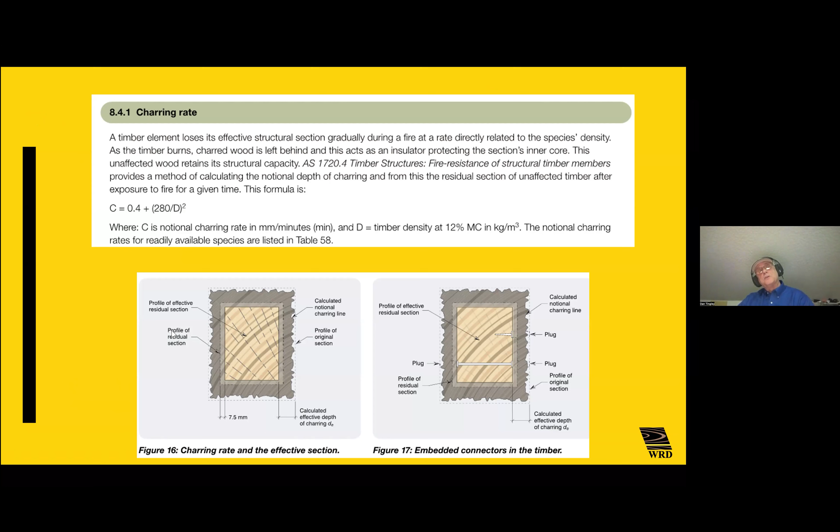How about charring? Who would have thought we could use high strength fiber to increase the char resistance and increase the capacity such that we could have a fire resistance rating of 2 and 3 hours in a mass timber building?

Another book we've just recently written and released is Timber Bridge Inspection, Maintenance, Restoration, Design Detailing Guide - a 956 page, 3-volume affair, where we talk about everything under the sun.

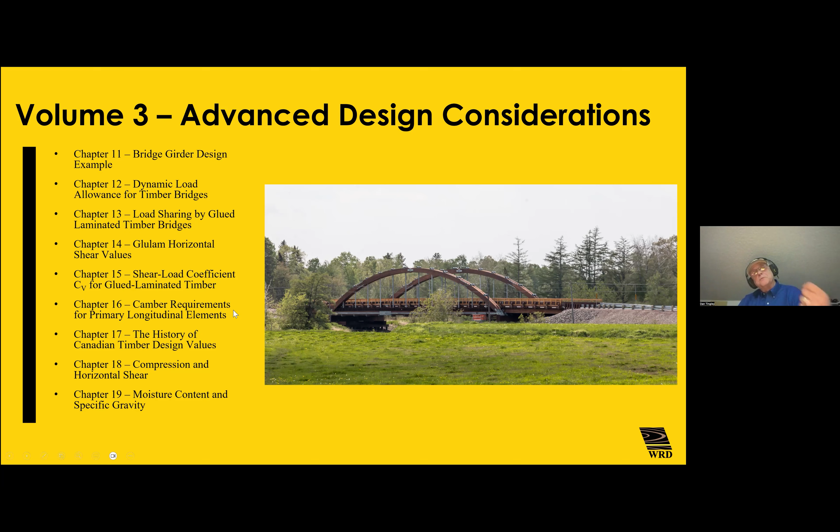As you can see here, timber bridges, detailing, restoration, and advanced design considerations - whether it be load sharing in large dimension timber elements, which now have developed load sharing factors of 1.2, for example, or whether it be talking about shear, the fact that at the reaction point the shear max drops close to the bottom face. That's why we can neglect shear distance D away from support - it's not at the neutral axis. We show that in a continuous piece that moves up, why we have to be careful of shear in continuous beams, because we can't neglect shear distance D away from the support due to that factor.

We often say that good wood is gone and that it's harder and harder to find quality wood. But what we don't really realize is that the good wood is still there - wood grows the same way it's always grown. In the Petrified Forest in Arizona, there's a bunch of Doug fir logs that fell to the bottom, covered with ash when the great inland ocean receded, and they were mineralized and basically petrified. They've investigated and found that these Doug fir logs grew the same way 250 million years ago as they grow today.

So when we hear this term, good wood is hard to find, it's gone, what we're really talking about is that the big boxes like Home Depot and Lowe's have put downward pressure on our grade standards. They pull a premium grade because they don't want to put a SKU number on somebody's 2x6 and have them pick through it and leave the bad stuff in the bin when they come Saturday to buy a 2x6. So there's pressure on the grades - we allow 5% off-grade on the grade, but they put pressure on it. So what we're really meaning is that the different ways we grade have led us to consider things like engineered wood, which allows us to use machine and reman to get the distribution of defects and increase capacity.

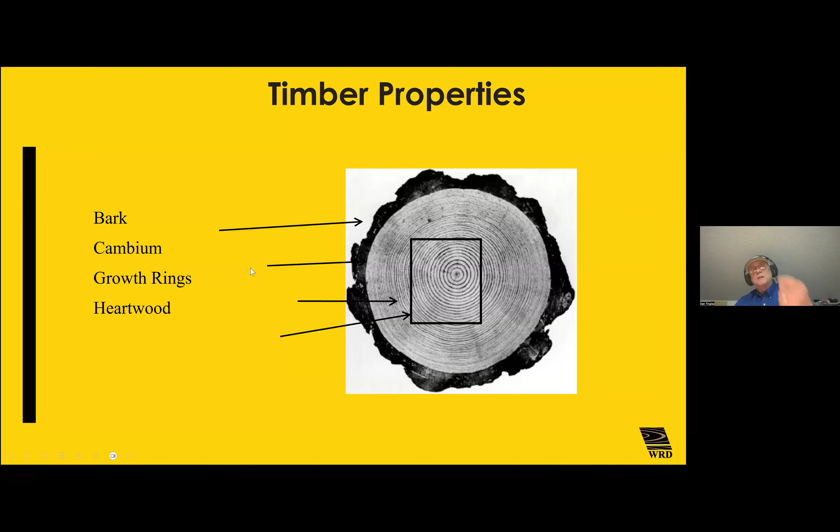What CLT has done is put that in a way that involves less reman, because we can use solid sawn now and cross ply it to take this Doug fir piece and turn it into solid sawn wood and run the CLT from it to form a mass timber.

Softwood trees are geotropic, they grow in response to gravity. Hardwood trees are phototropic, they grow in response to light. So the Achilles heel of a hardwood tree is slope of grain. That's not the case with softwood. It's why the northwest part of the United States became the wood basket of the world. You had a specific gravity of 0.48 to 0.52. You could nail it, you could cut it. It had good slope of grain properties, and it was strong and lightweight.

That's the way we want to deal with wood today. Not to use the term that the old growth stuff is gone, but instead consider timber in its regenerated fashion, and the fact that we can use it in a variety of ways by using advanced materials with it.

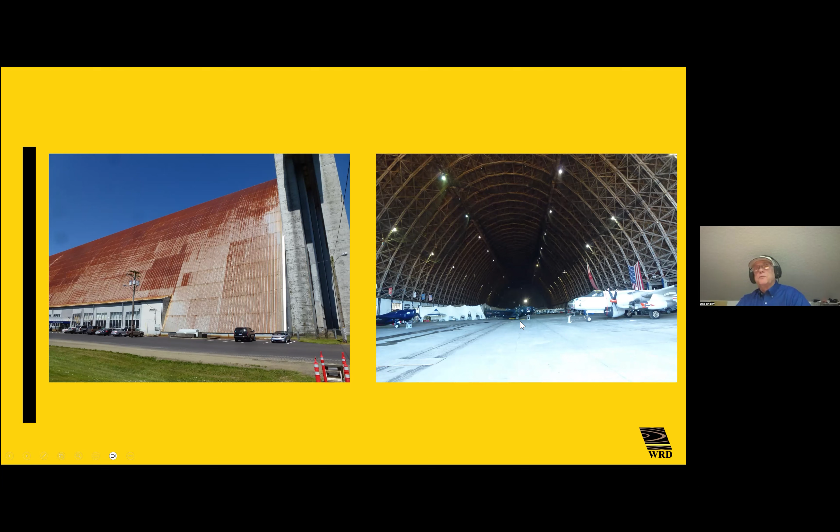I often like to look at this one, the Tillamook Air Museum inspection. This is one of the seven construction wonders of North America. It's 22 stories high, 260 feet wide, 1,000 feet long, made with 3.5 railway train loads of wood back in the Second World War when the steel was going to bullets and tanks. They built it out of timber, and they housed 8 blimps in there that were used for inspection for submarine detection on the Pacific coast. Now it's used for an aircraft museum, all made from timber.

This was in the 1940s, the mass timber edition of the 1940s. Wood hasn't changed much in hundreds of years, it's how we use wood that's changed. That's what's caused the difference today, as we put wood together in different ways and market it in a way that allows us to get where we're going.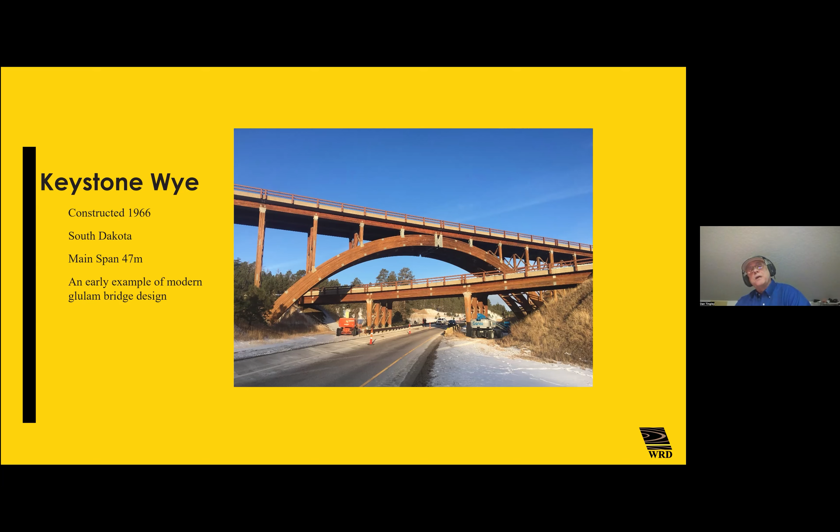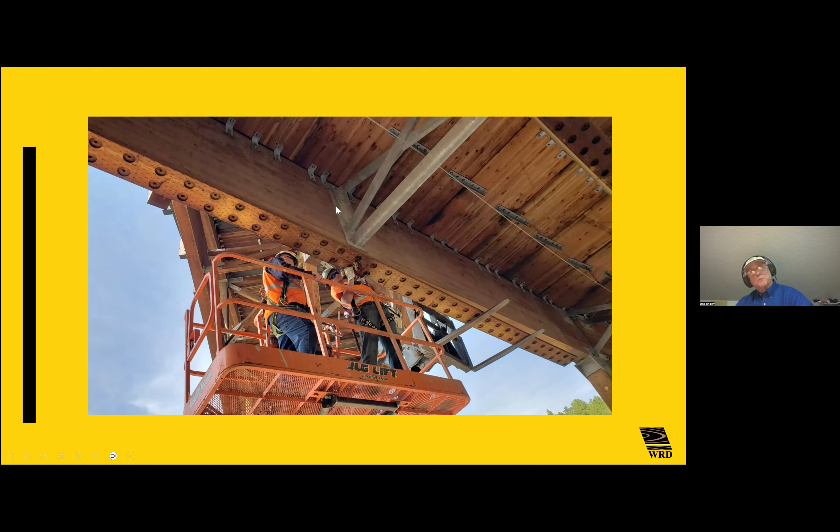It was in great condition, so let's put it back into service. We used high strength fiber, put it on the bottoms of the girders to double capacity. We changed the concrete panels out to vertically laminated glulam deck panels. That reduced the dead weight on the bridge by some 75%, which increased the capacity just by changing out that dead weight and putting the high strength fiber on it, and put this bridge back into service by paving on top of it. There it exists today. That timber bridge is set for another 50 to 100 years.

This is one of the big ones I always like to talk about, because it was where we won some awards. It was a 3-pinned design, the longest 3-pinned design in Canada, called the Roger Bacon Bridge. I won several awards for this bridge, and it's not that I'm winning awards that's the big thing for me, it's why we won that I want to talk about in this particular case.

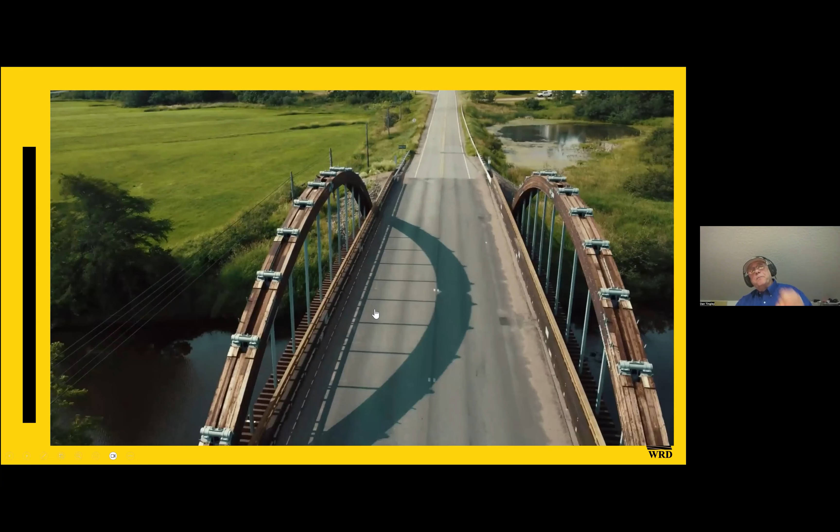This bridge was built in steel. We replaced a timber bridge from basically the late 1940s with a steel bridge in the highest embedded and exposed corrosion zone in the country. This is what happened to it. This steel bridge was installed on old piles that in the '40s were already in service for 90 years.

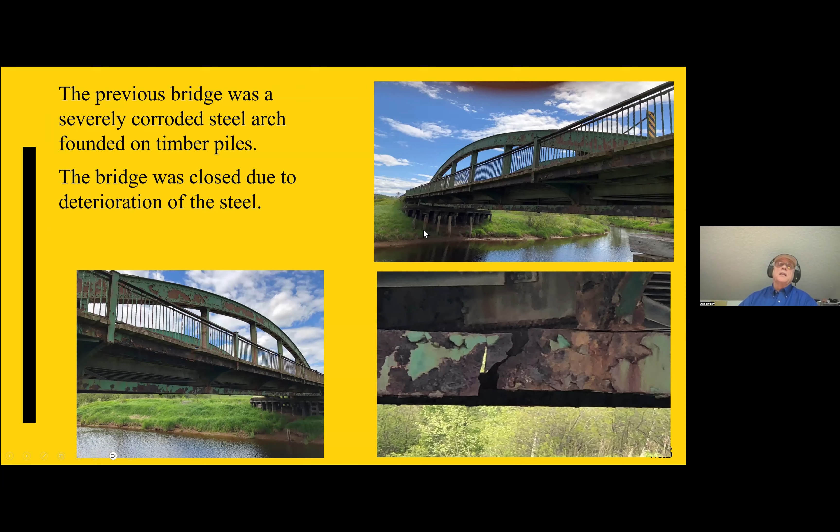What I really loved about this was taking this new lightweight timber bridge, replacing a steel one, using the old piles that had been there already for 90 years old. When they were installed, they were 180 years old. They're basically containing embedded carbon, and we're using a carbon-friendly solution to go on top of them.

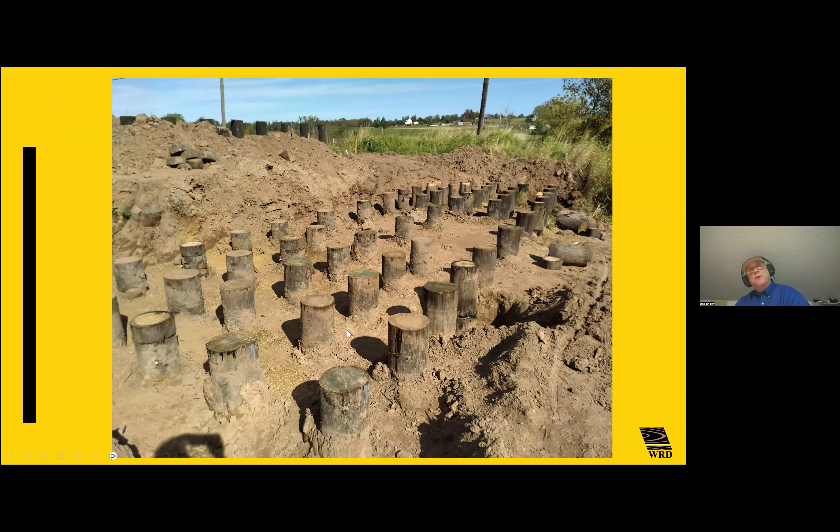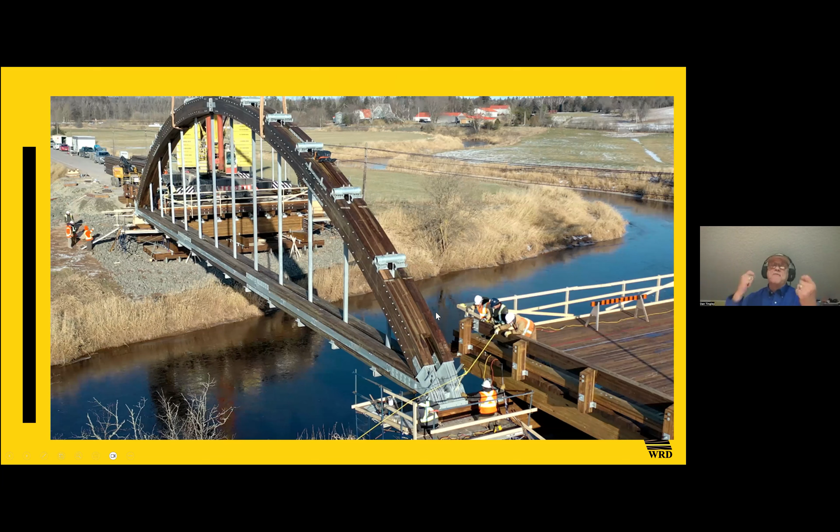And who would have thought that we could put a 500-ton gull wing crane on a timber jump span that was finished 7 days before? Could we drive a 500-ton gull wing crane out on a CIP concrete bridge that was finished 7 days before? Not mighty likely. If we tried that, that crane would be sitting on the ground. And that timber bridge carries that crane and basically allows us to lift that 3-pinned arch across into the gap.

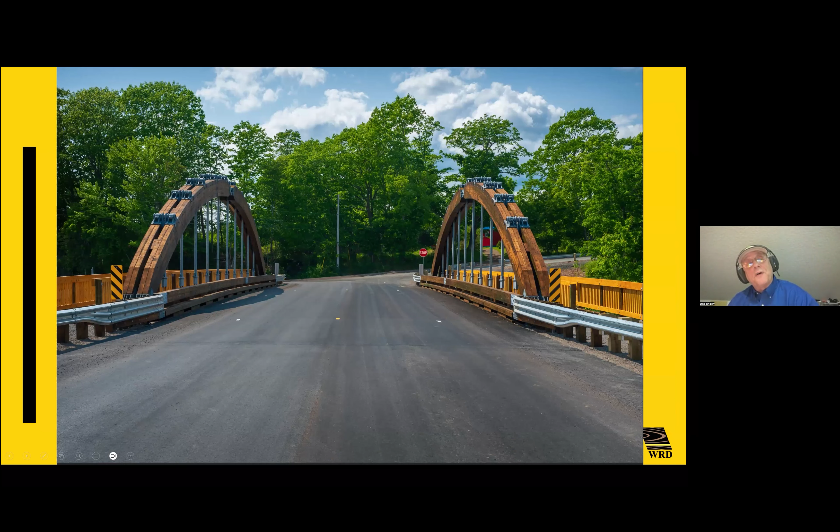And form up this beautiful bridge, which led to another bridge like this one getting built, which was going to be concrete. And this bridge come in the same way. Why? Because the client saw it was a great solution, lower cost solution by 35%. And this is why we're seeing timber bridges come today. As you can see here, beautiful timber bridges, mass timber bridges built.

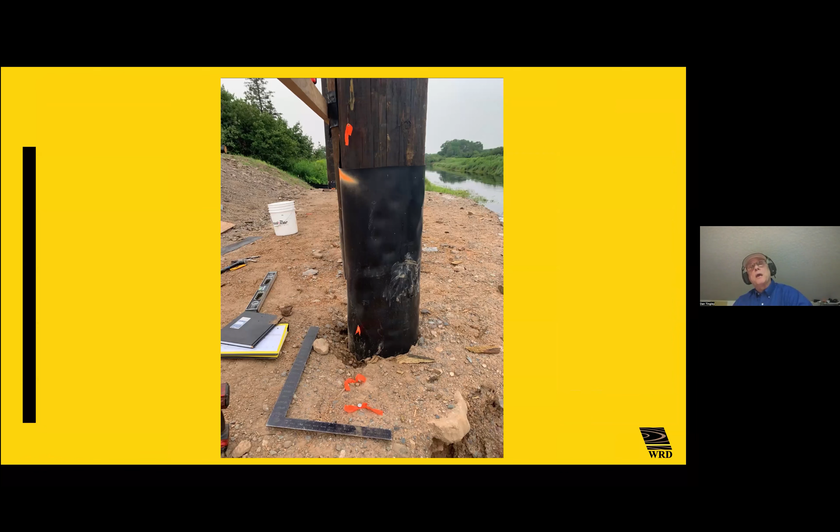This province in Canada, for example, now has gone from letting rural highway bridges be spec'd in timber. Now they're considering letting concrete bridges that are going into their Trans-Canada type bridges being spec'd in timber, as you can see here in this beautiful bridge. Another 25-meter span one, the same thing.

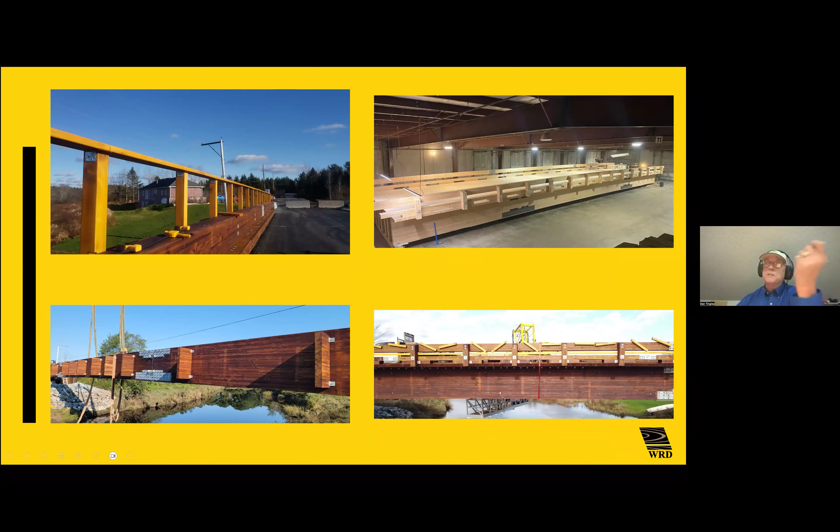Mass timber bridges moving into the industry, as I showed you earlier. Mass timber being pinned to the rock outcrops, total wood, everything's wood, including the abutments, all designed and built with this in mind. And the people love these bridges. They're aesthetically pleasing. They're lovely to work under and be around.

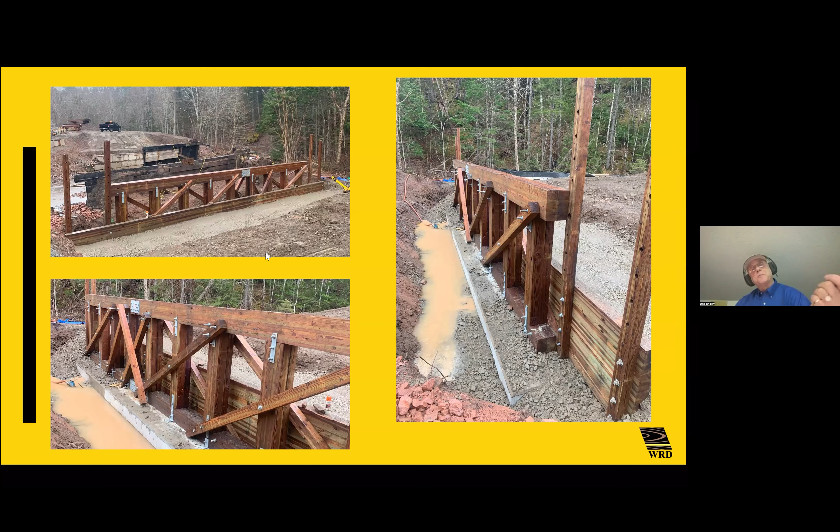This bridge right here is a new one. I just put this one in. As you can see here, this is a mass timber bridge. It's built on basically a 450 span situation, 450. It's going to be a light vehicular pad bridge. It's there with a tidal zone where the river flows both ways. We simulated the natives of the time, the early Indian settlements that were there, with a lot of the sweep. We put it into rise and fall. These are the concept drawings here.

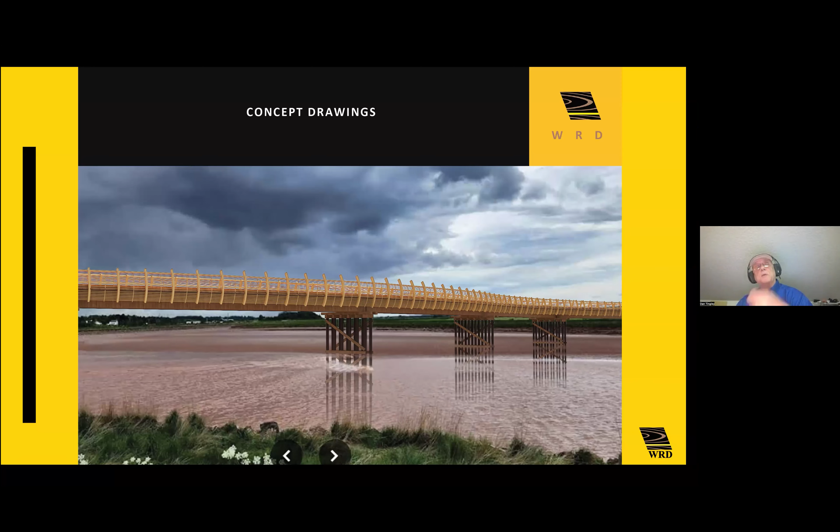It's a cost advantage. The bridge itself costs 33% less than steel, has a design lifetime of 100 years, carried 62.5 tons just like steel. Timber can get it done. It's just all in the design. It's how we plan and how we do it. It's what we do in our design side that helps the timber go the distance. Don't disadvantage it with connectors from the top, for example. Don't go there. And basically build that timber bridge in the correct way, and it'll go the distance.